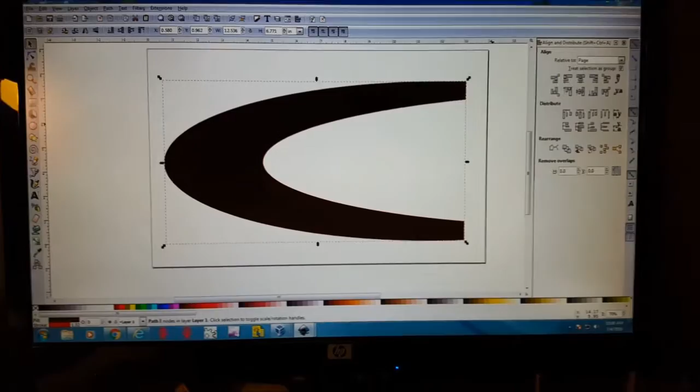Retro clocks are just fun to make. So I was looking at some mid-century modern designs and thought we'd throw something together pretty quick. I've got a few scraps laying around the shop that I'm going to make use of. So these were drawn up in Inkscape. Very simple, very easy designs.

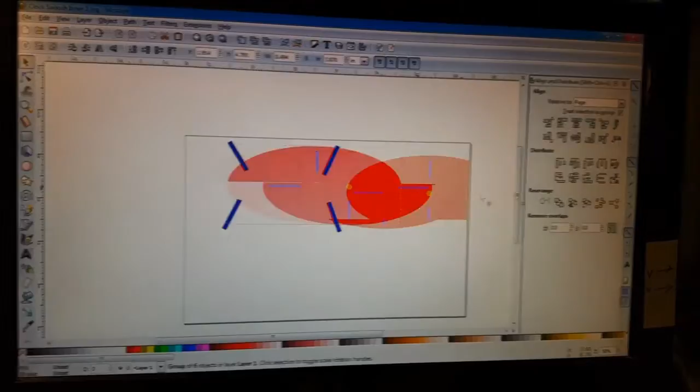This is going to be our outside, and for the actual clock part that's going to sit inside of there, we're going to use this guy here. I've got this broken up into two different folders, or two different screens. But the way this is going to work is this is going to sit in here. Clock parts will be behind here, and they'll put a few bars in the back for some design.

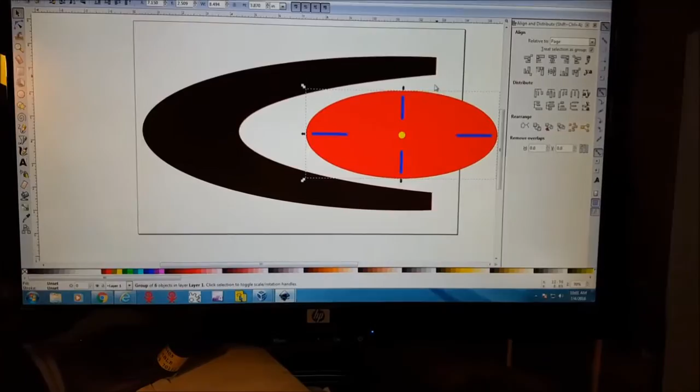For my CAM work, I use jscut. It's a free program. It's really cool and it's very powerful for a lot of these projects. We're going to keep this real simple. Here's our swoosh for our outside part. I can cut this at about 90, which is pretty quick. Do a shallow cut each time, about a 16th,

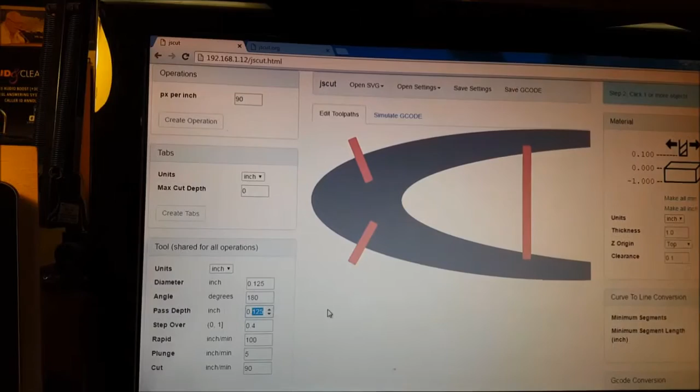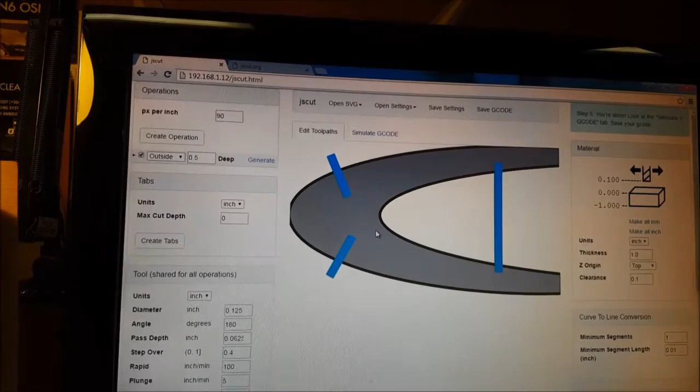0.0625. Then we click on our shape, go up to Create Operation, and we're going to do an outside cut. We want this to be about a 1/2 inch, because that's the wood that I'm using for this. Click Generate. You can see the line forms there, and then these are our tabs. And for tabs, I usually do about half the depth of the wood. So if we're cutting a 1/2 inch here, we'll make these about 1/4, 0.25. Create tabs, and then it all goes to red.

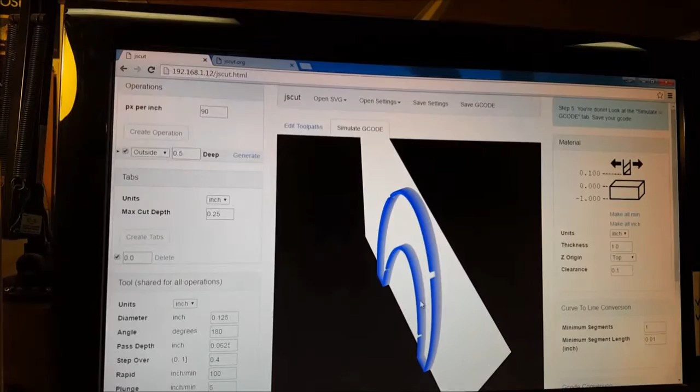And then to see what it looks like, we go to Simulate, and you can see the cut. And you can see the tabs in the back here. So these are the areas that will not be cut, so it'll hold tight to the wood. And you can actually see how long this will take to cut. We click on here, very fast, 316 seconds. And then we save this so we can open it up in Mach.

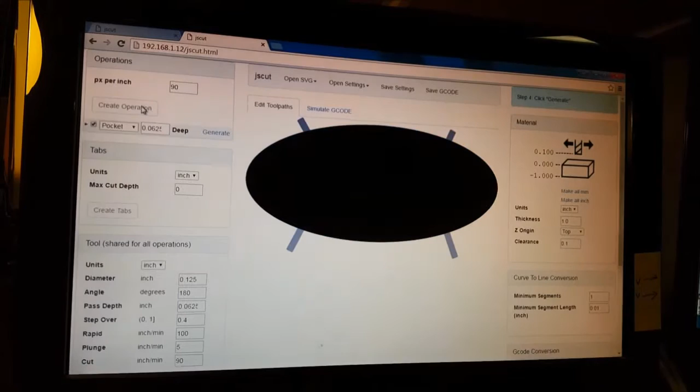And this is for our second piece, our inside part where the clockworks actually will be. And just like the other one, we're going to change this to 90 for our speed. Do a 1/16 of an inch here for each pass, 0.0625. And then we come back up here, click on our shape, create our operation. We're going to do an outside cut again. And this one is thinner wood, so we're going to do 0.35. Gotta be careful, sometimes an extra decimal will pop up there. We go to Generate, and here's our line.

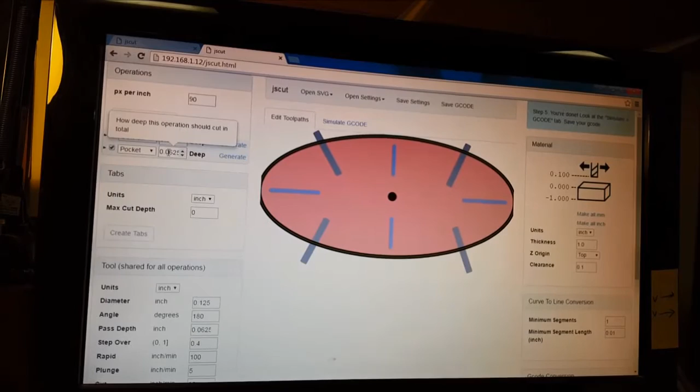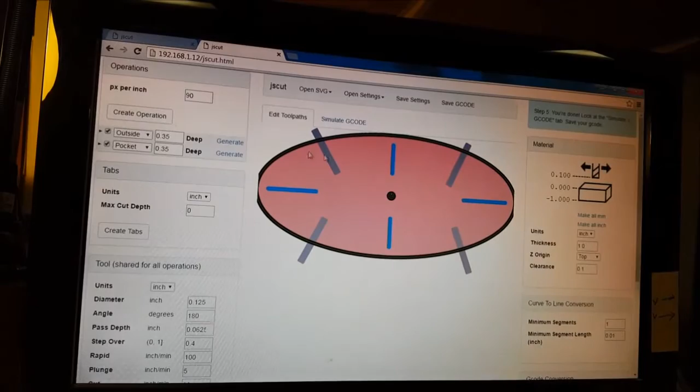For the hole for the clock parts, we'll click on that. We'll do another operation, and this is going to be a pocket, but we want this to go the whole way through. So we'll do 0.35 for there. We go to Generate, and you can see the little lines it cuts through there. These are kind of our markings for 12 o'clock, 3 o'clock, 6 o'clock, and 9 o'clock. And for these, we just want a groove in here. So we're going to do another pocket, but we don't want it to go the whole way through. So we'll make this smaller, maybe 0.125. And you can see that those are there.

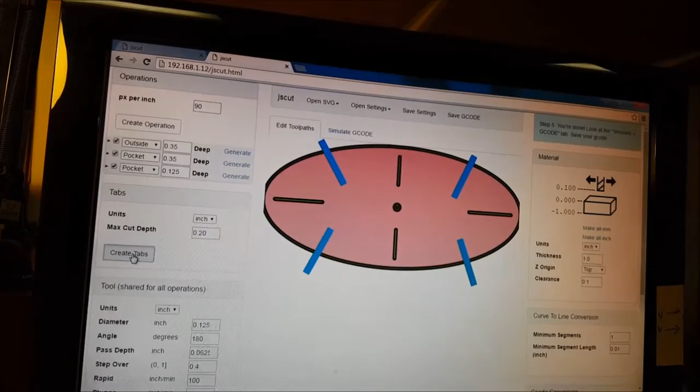These are our tabs again, so it all holds tight. And again, I do about 1/2 of the depth here, roughly speaking. So we'll do about 0.2. I could change that a little bit. Click on that. See the tabs are made. And then we go to Simulate, and you can see what this all looks like.

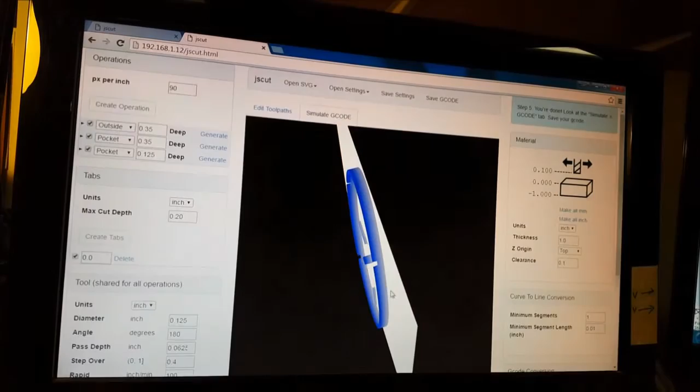So there's our hole for the clock gear stem. Here's a little indentation for our markings for 12, 3, 6, and 9. And you can see the tab cutouts, so this will stay attached to the wood. And then for the length of time for this, 151 seconds, pretty fast. And then we save our G-code so we can open it up in Mach.

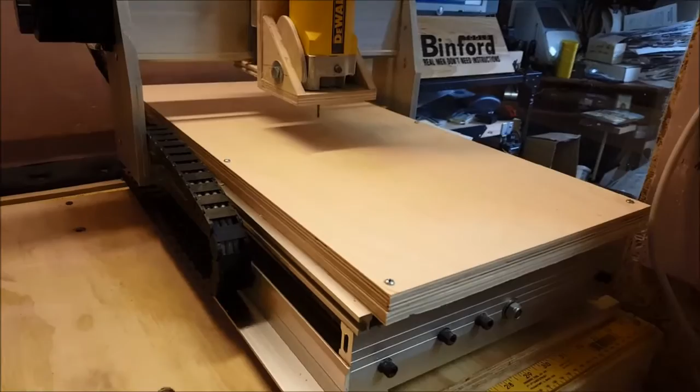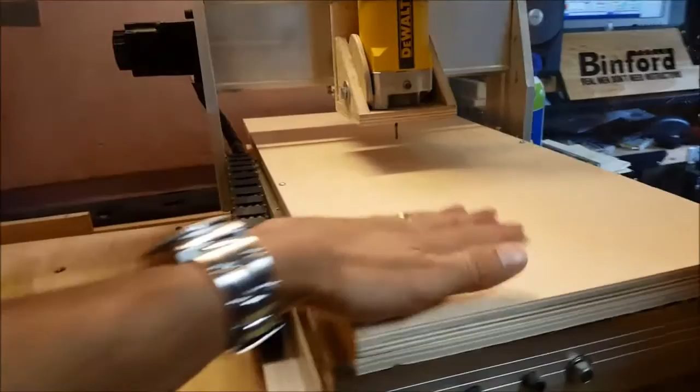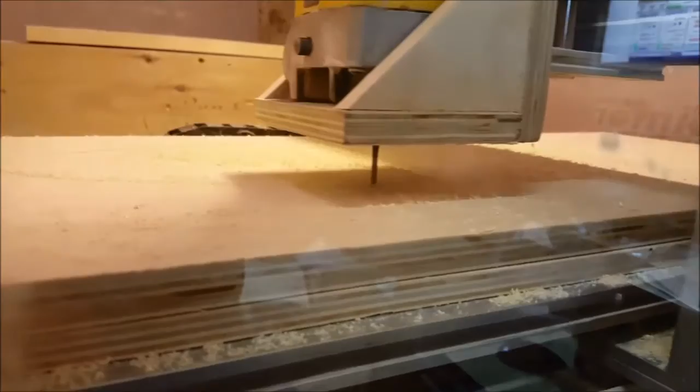And for those folks that have followed my other videos, as far as my clamping down method, I keep it really simple. I've got a spoil board here, which is just a piece of old birch that I screw my actual pieces to cut down to, and it holds it really secure and really tight. That's our outside piece. Very fast, easy cut.

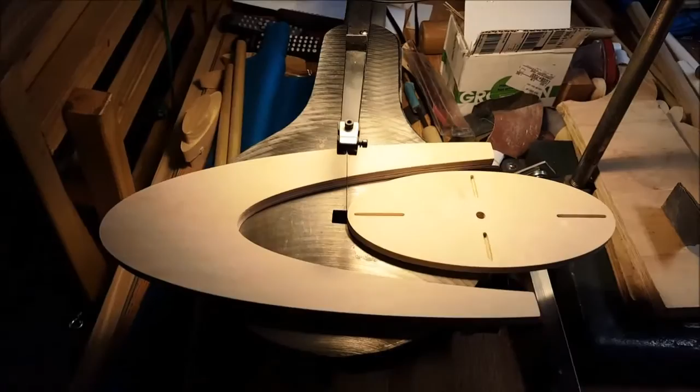For the inside part where the clock will actually be mounted, I'm using a scrap piece of ply here from the junk bin. So we've got the file loaded up in Mach, and let's cut out this part. There's the inside piece. See, with the tabs and our hour markers not all the way through. Those are the two pieces, two fast cuts and a little bit of sanding.

The way we're mounting this is really simple, just some brass rod and some gel super glue. If you don't use a gel, it'll just kind of wash away and won't hold on. So just two brass rods there, and then we'll turn this over and glue it to the outside. And this has just been glued together. I dug a little teeny channel underneath these so there'd be a little bit more to bite, but the glue holds pretty well. It's not moving at all right now. And that's all there is to it.

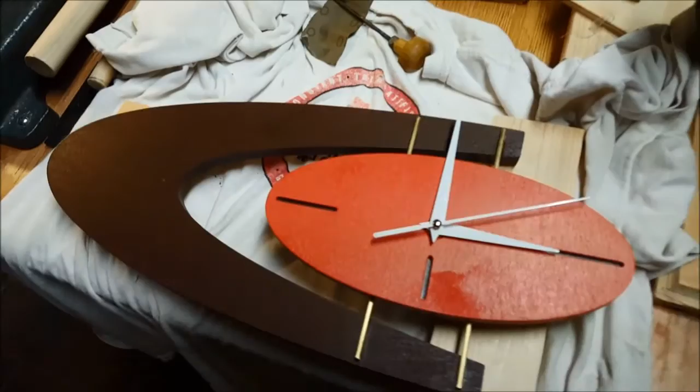Those little arms snap on. The little watch kits or little clock kits are less than $2 online. The materials here were just some birch plywood and some brass rod. Fun, easy project to do with Inkscape, JS Cut, and a little CNC machine. This could also be cut out by hand. And the results are pretty cool.